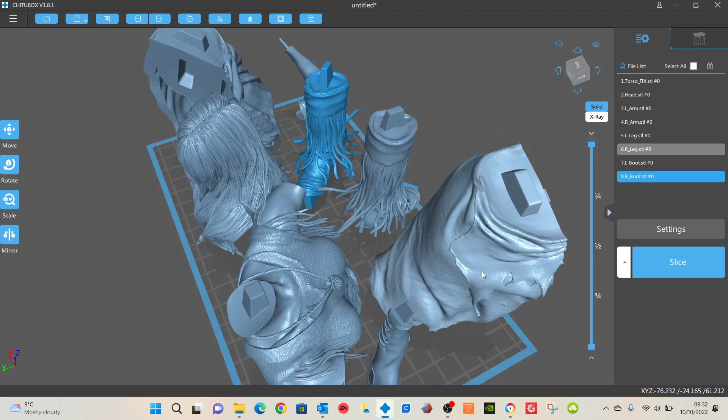So everything's been loaded into Chitubox using version 1.8.1, and this is how I've laid it on the build plate. I've reduced everything to 75%, just basically so I can fit everything on there.

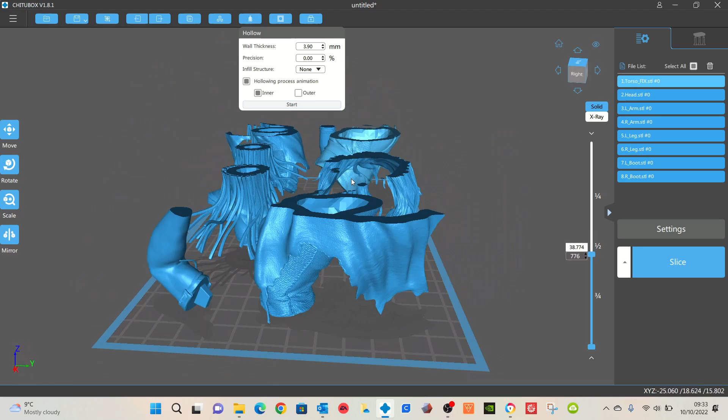Now I'm going to hollow everything out, and I think that's really important to save your resin. So I'm using a 3.9mm hollow, and there's my settings there, and voila, press the button and everything will hollow out. Now what this does is a couple of things. It saves you an awful lot of resin, and it makes your model a little bit lighter as well, but there's a few things you've got to do with it to make sure that it's safe.

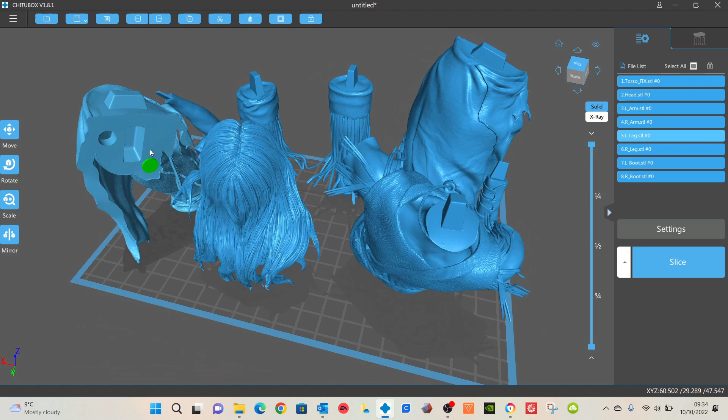So once you've hollowed it out, you must add some holes in there, and I'm going to use some 6.5mm holes, and that will become apparent at the end of why I'm using holes that large. Just find some spaces in the model and click them in there. Now I don't save the little bits, the little plugs. You can do that, there's an option to do that, but I don't do it.

So pop some holes in there, and it's really important you do this for drainage. You do not want uncured resin in your models. They will split without doubt. A little bit of heat, a little bit of time. If you haven't holed them out and you haven't cured the insides of them, they will split, and we'll talk about that at the end.

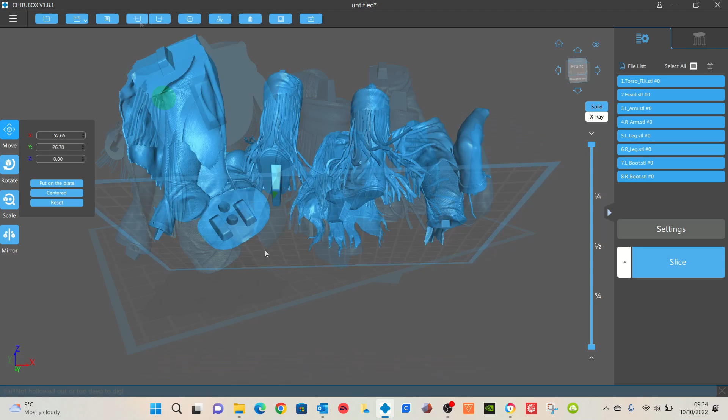I'm going to show you what I do with them afterwards. So when you've got all your holes in that you're going to fit, sometimes you'll find that where you click will not put a hole, and that's fine. You might need to reduce the size of the hole a little bit just to make it work. So just tweak it and twiddle it, change the size of the holes. Find out what works for you, go around the model and just add those holes in, but I can't stress enough it's important you do it.

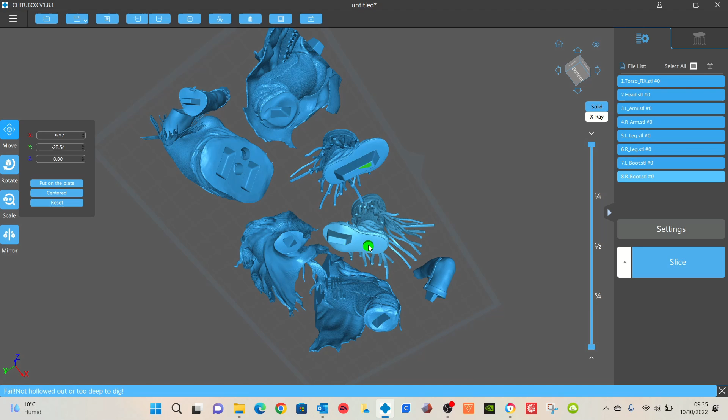Now you will see me at the end, we'll come back to this, I'm going to drill a few holes in where I've been unable to add them in this post or pre-process. I'm going to add them post-process with just a little 6mm drill, just to make sure that my models are not going to split or ooze out resin at the end of it all. And as I say, that is a really important part of it.

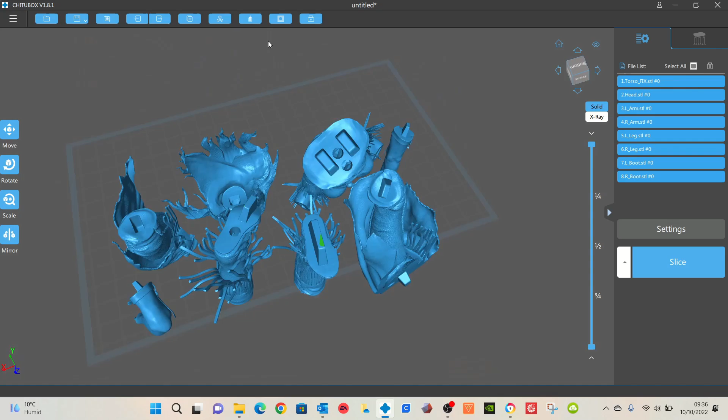So there you go, we've loaded the models on, as you can see. The orientation, I've made sure that there's gaps between them. I'm trying to put things as well so that I'm using minimal supports.

And what I'm going to do over on the supports now is adding a raft. I always use a raft. You may not, but this is how I do it. And these are the settings that I'm using.

Now I'm using heavy supports, and I'm using quite a high density of supports. I'm not saying you must do it this way, but I have found with my Saturn that I have had a lot of things sticking to the FEP, so I have to bolster the supports to make them work. Again, these are my settings, you don't have to copy them, but this is what works for me.

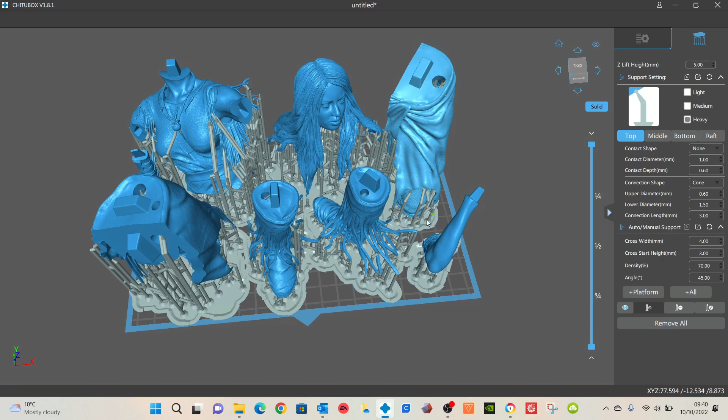Now I'm going to add those supports in, as you can see there, using auto supports, which I always use. But what I'll do now, I'll just have a little look at the model and I'll go around it and see if there's any little islands of red that have no supports on there. And if I see any sections of red that I think need a little bit of extra support, or I'm just going to bolster the support there, I'm going to add them in. Chitubox allows you to do that easily by just literally left clicking, and away you go.

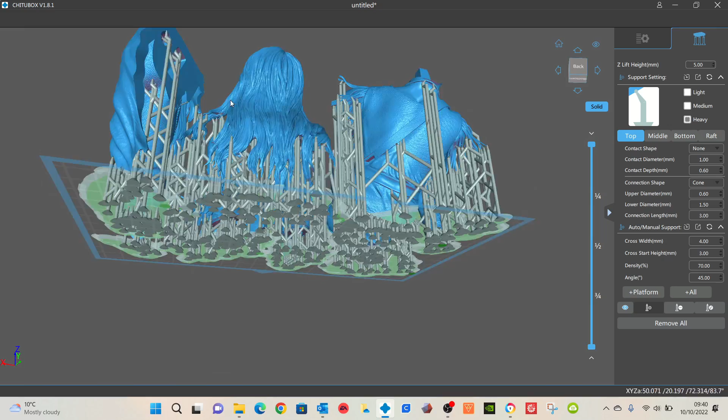I'm going to add them on places as well, like under a chin. Chins tend to fail sometimes. You might not have experienced that, but I know I definitely have.

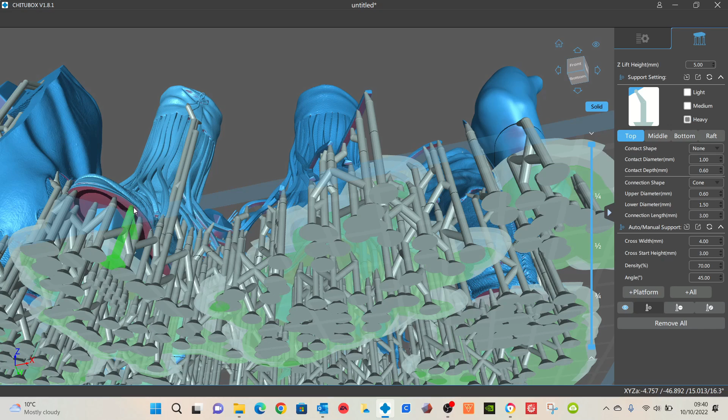So I'm just going to give a few more supports on the chin area there. There you go, so there's plenty of supports on there. But if you can see some red areas, I think I probably overdo supports, and that's from failure after failure in the early days of using my Saturn, where it just was sticking to the FEP. So I have gone a little bit over the top, and I'm sure you'll agree I have, but I know this will come out one piece, so I might use a little bit more resin, but I know it works. And there we go, it's all done and dusted, as you can see.

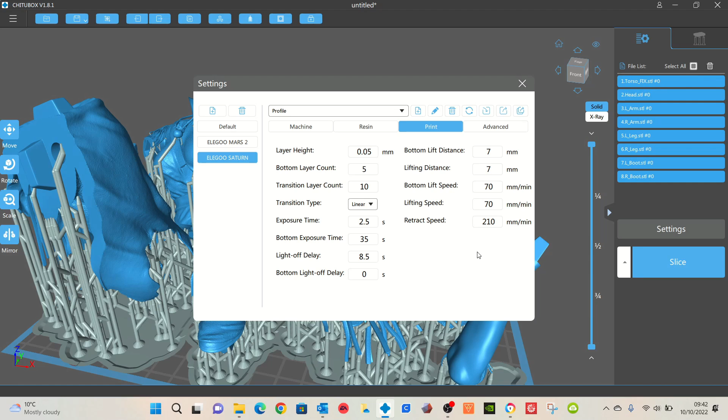These are the settings that I'm using, and for my print, usual things really: 2.5 seconds each layer, 35 seconds on the bottom layer, and 5 bottom layers. And if that little warning comes up, it means that one of your rafts is just poking over the edge.

It's absolutely fine, tell it yes anyway, and away you go, and you can slice that model up. Now it's not using too much resin here, just 204 mils, which is a fifth of a bottle, which I don't think is too bad. If you hadn't hollowed it out, boy, you'd be using a hell of a lot more.

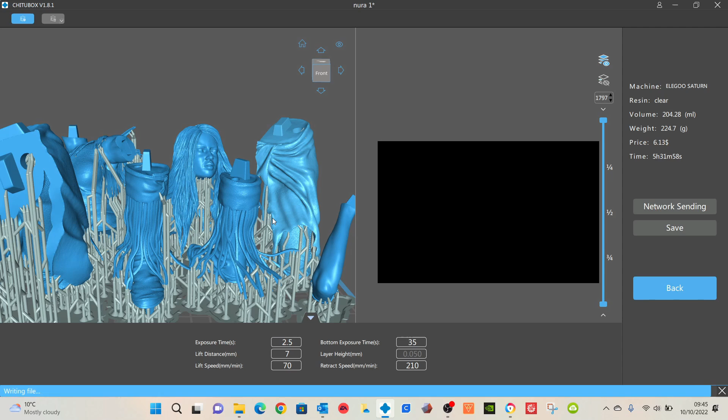I'm just going to save this now onto the computer. I haven't got my USB stick in at this point, so I'm saving it directly onto the computer. But if you've got a USB to hand, save it directly to your USB.

What I have done now is I've gone and fetched my USB stick, and I'm just going to have a quick look at it just to make sure I've got enough room. Always check you've got enough room for your models, and I've got a gig left there.

That's absolutely fine, I want to avoid the situation where you've loaded it on and only half of it's gone on. I've dragged it onto the USB drive. It takes a little bit of time to copy across, so I've sped the process up just a tad, and that is now on my USB drive ready to hit my printer.

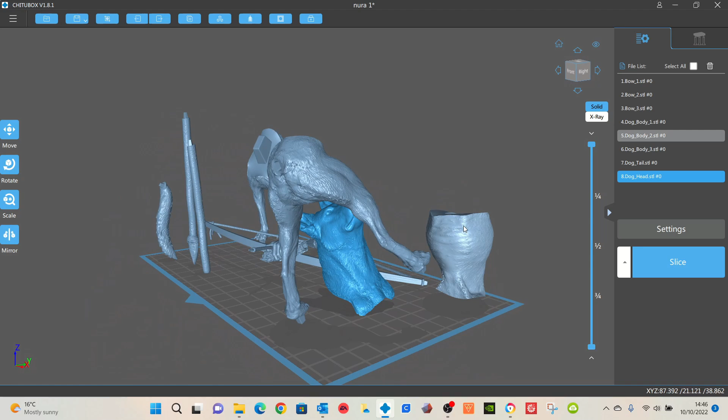I've built the second part, or put the second part on there. I had to do it in two parts. The dog is there and a few other bits and pieces like the bow. And I'm just going to use Chitubox here just to move things around, just to make sure that nothing is touching, that I'm happy with the orientation, that everything is where it should be.

Now the bow, this is how I've orientated it. You may choose to do it differently. You may choose to orientate the whole model differently. Again, this isn't a 'you must do it this way' video. This is how I do it video.

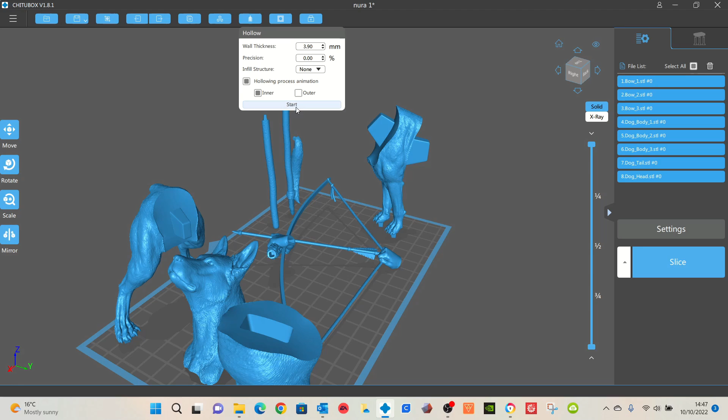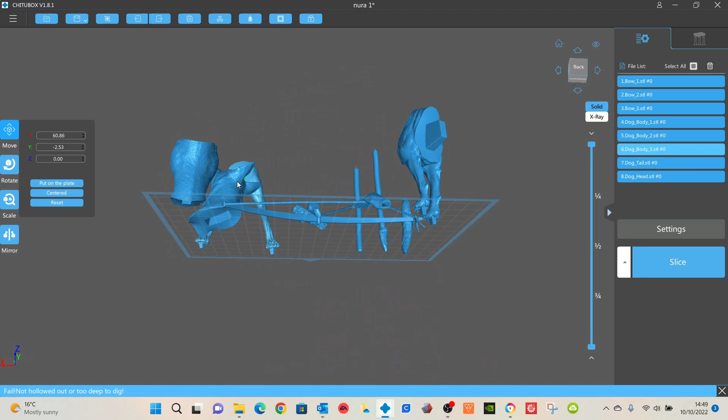And I'm going to do exactly the same process, hollowing out the model to a 3.9mm wall as I did in the previous one, and you'll see me go through the same steps, adding in a hole, trying to get a 6.5mm hole to make sure that I can fit my inside curing lights in there at the end. So I'm just going to look through the model now, see if there's any places I can add a hole to. Simple as that.

And I know now that that model will drain really, really well, and I'm not going to have it splitting a month, 6 months, 12 months down the line and ruin all that hard work that I'm going to put into it. I'm reducing the size of the hole, and I'm going to go around and find more spots.

You get the picture, don't you? Make sure you add holes to your models. And if you can't add holes to your models, drill them in at the end, post-process.

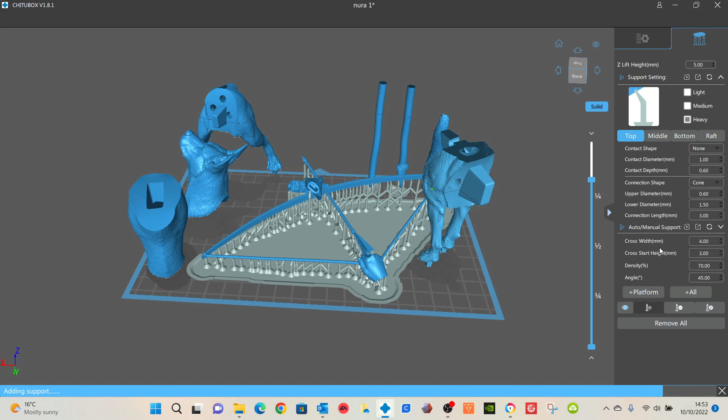Same settings for my raft, same settings for all my supports, and I'm just going to go around and fill up some of those red areas just to make sure I give it plenty of support. You will have to do a little bit of post work when you get it off and a little bit of sanding to get it all working, but well worth it to know you're going to get a successful build.

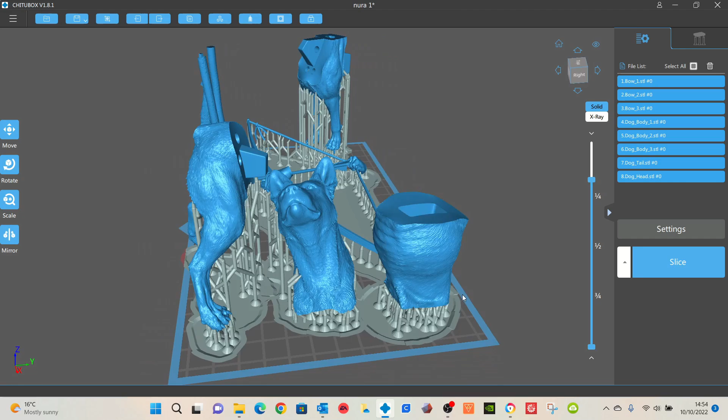I'm slicing the model here, and the amount of resin that I'm going to use for this one is only minimal. There's not too much on the plate there, it's just about 90 mils. So I've not used a vast amount of resin for both models, which is absolutely great. Going to save it exactly the same as I did before, and job is a good one.

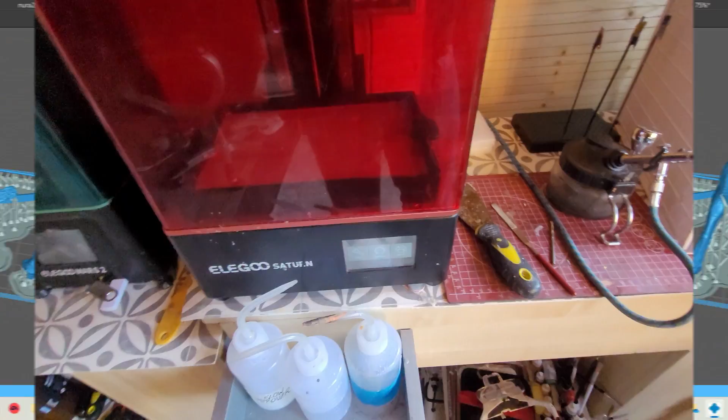Right, moving over to my Saturn now. I'm going to pop my USB drive into the side of the Saturn, go down to the front screen and select the print option. And once I've selected that, choose the model that I want to print.

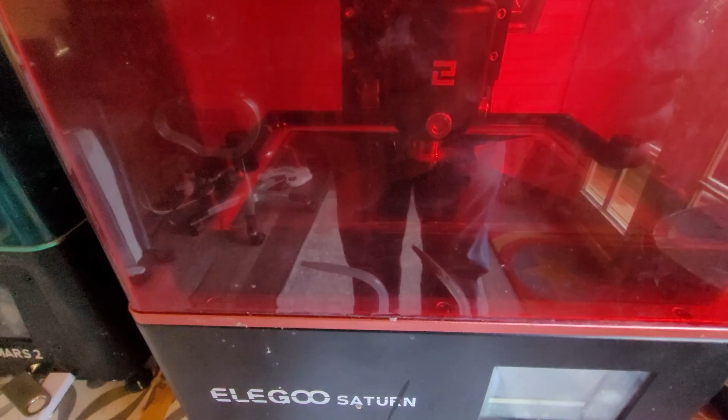Press print, and away we go. The build plate will fall slowly, not this quickly, into the resin. Nothing will overflow, I am absolutely confident, and the first layer is going down there, and that's the printing process now begun on my Elegoo Saturn.

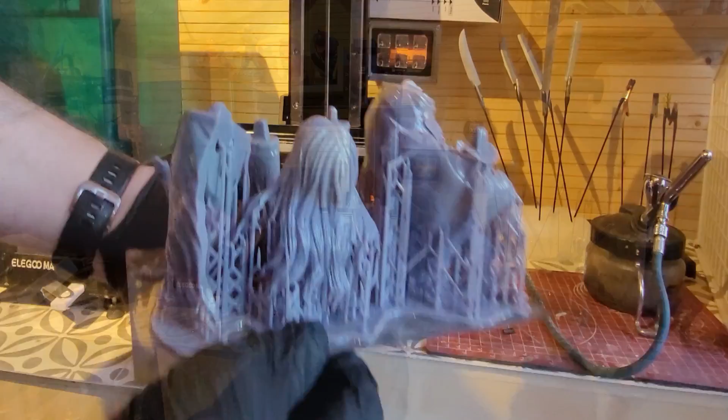Right, so it's about 8.5 hours later, and the water washable Elegoo resin has done its job absolutely admirably. I'm using a BigTreeTech build plate here, a flex plate, and I've just took it off. That's how easy it is to get off. And voila, everything as printed, 100% perfect. All that pre-prep work, the support settings and everything else have made this model, for me anyway, come out absolutely marvellously. I've printed it in my shed. It's been fairly cold in there, around 7 to 8 degrees, and everything's come out really, really well.

Now I'm taking the models off the supports carefully, because there's quite a few delicate parts on this model, but take it off as best you can. Give them a little waggle, give them a little pull, and off they will come. And now, with everything off, pop it into some cold water.

This is the first process of cleaning, so into cold, clean water. It's water washable, so I can do it. And with the flex plate, watch this - this is how easy this stuff will come off your flex plate. No banging it, no scraping it, no worries, no problems. There you go. A little twist, a little poke, a little flex, and it's all come off.

Now I'm going to give it a little bit of a scrape, but I need to clean that as well, so I'm popping that in the cold water first. Okay, taking everything out of the cold water now, what I've done while it's in there is give it a waggle, emptied it out, give it a waggle, emptied it out, making sure I get as much of the inside resin out that I can. And I'm going to move it on to the second process, which is hot soapy water.

Into the basket, let it have a soak for about 3 or 4 minutes, just give it a waggle while it's in there. Once I've done that, I'm going to get the pieces out one by one, wipe them over in that warm, soapy water. Where the holes are to drain it, I'm going to fill it up again, give it a shake, tip the water out, fill it up, give it a shake, tip the water out. It's so important you get the resin that's inside out.

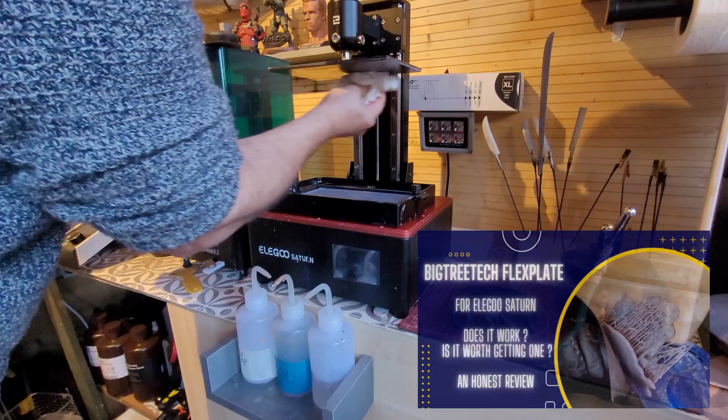Now that build plate I told you about - I'm just taking P60 sandpaper and giving it a bit of a blast over. This allows the resin to stick to it much better when you put it back in the vat. Get all the bits off, all the nastiness from your sanding. The great thing with these flex plates is you can literally leave your build plate on - you just need to pop your flex plate on and off again. Make sure you get the resin off the bottom of your flex plate and just pop it back on.

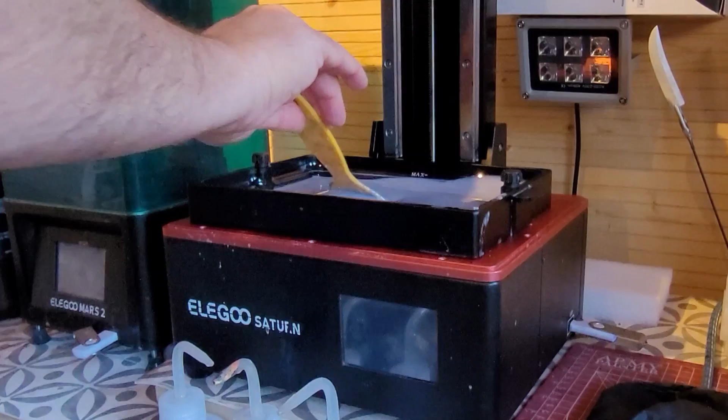I'm using that plastic scraper to gently push through the bottom of the FEP to make sure there's nothing stuck to it. Again, I do this - you don't have to - but I want to know there's nothing going to damage my FEP when I put my next print on. I'm using this UV water washable resin - I always use water washable. Give it a shake, I've poured it to the max line, and I'm now ready for my next print, and I'm going to do the next one.

Now, I'm not going to take you through the whole of the next print - you get the gist of what I've done. The same process will occur here as with the first one: I'll print it, take it off, wash it, drill holes, swill it out properly, cure the inside and outside, and the model is done and dusted.